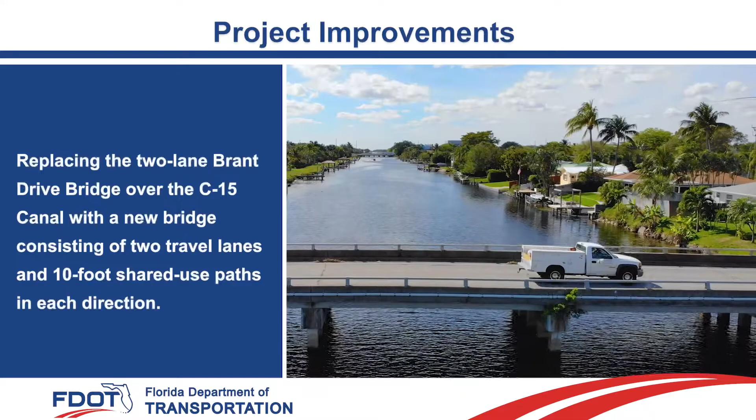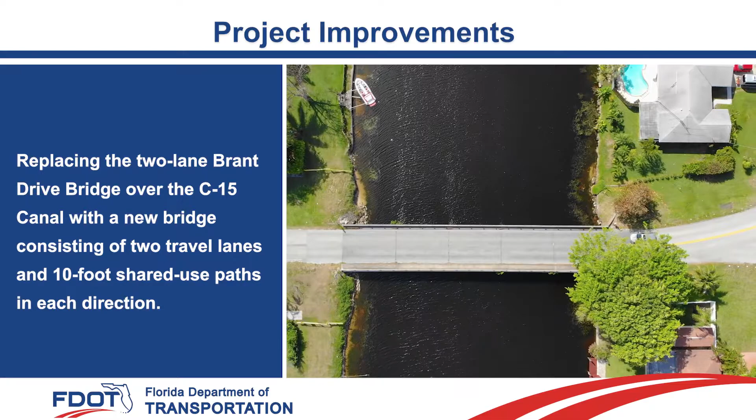Project improvements include replacing the two-lane Brant Drive Bridge over the C-15 Canal with a new bridge consisting of two travel lanes and 10-foot shared use paths in each direction.

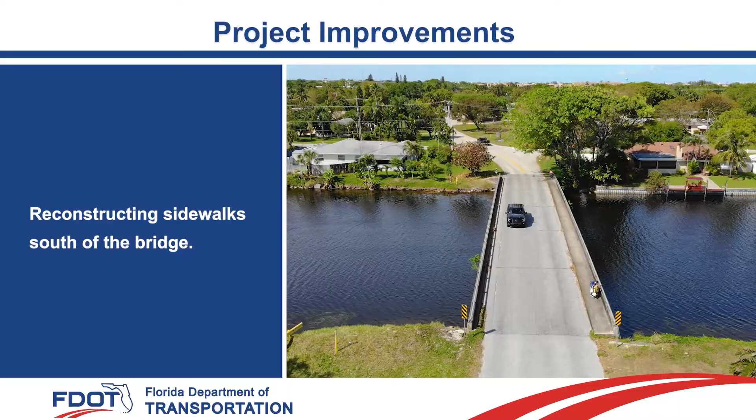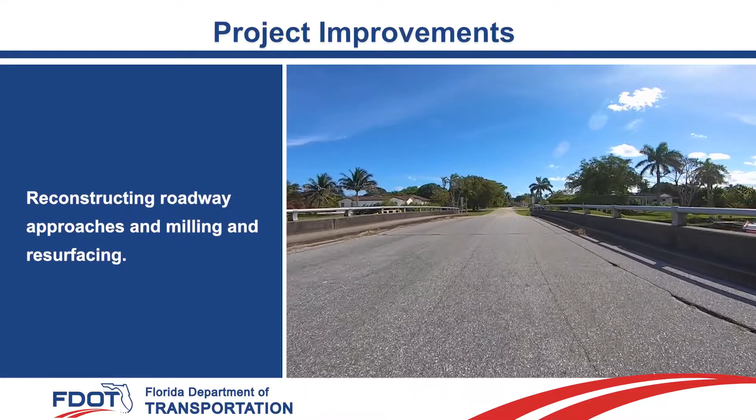Constructing 10-foot shared use paths in each direction north of the bridge, reconstructing sidewalks south of the bridge, adding decorative lighting and drainage, upgrading signage and pavement markings, and reconstructing roadway approaches and milling and resurfacing.

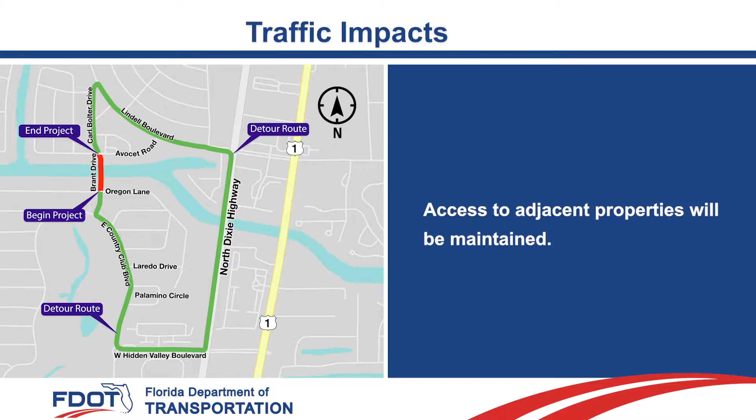Traffic impacts include a full bridge closure that will occur for the duration of the construction. Traffic will be detoured onto North Dixie Highway via Hidden Valley Boulevard and Lindell Boulevard. Access to adjacent properties will be maintained. Navigation of the canal will be maintained for marine traffic.

The project is anticipated to be completed in late 2022 at an estimated cost of $2.47 million.

The Florida Department of Transportation District 4 will host a construction open house, both in person and virtually, regarding the bridge and roadway improvements for this project on Wednesday, July 14th. Participants may attend in person or online. Representatives will be available to provide information and answer questions. Project documents will be available at the meeting and at

Participants may also call in at 1-877-568-4108, access code 167-329-759.

The in-person portion of this meeting will be from 6:30 p.m. to 7:30 p.m. at the Delray Beach Public Library, located at 100 West Atlantic Avenue. The latest social distancing guidelines will be followed.